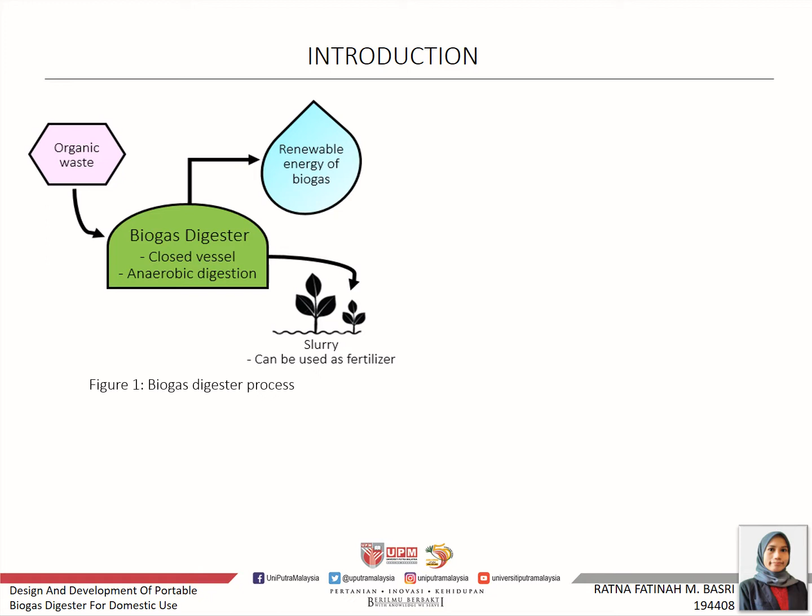In this study, a comparative review on available design types of portable biogas digester was conducted to determine the suitable digester design type to be fabricated and modified to meet domestic requirements.

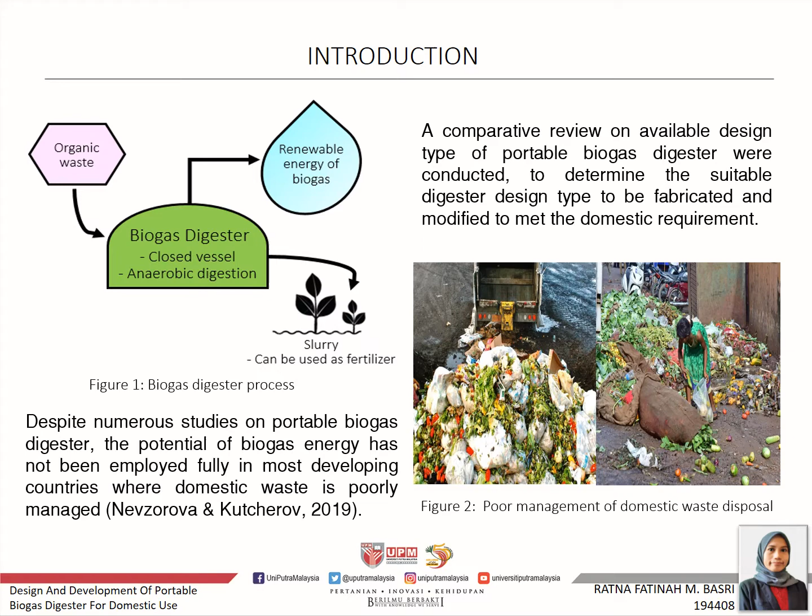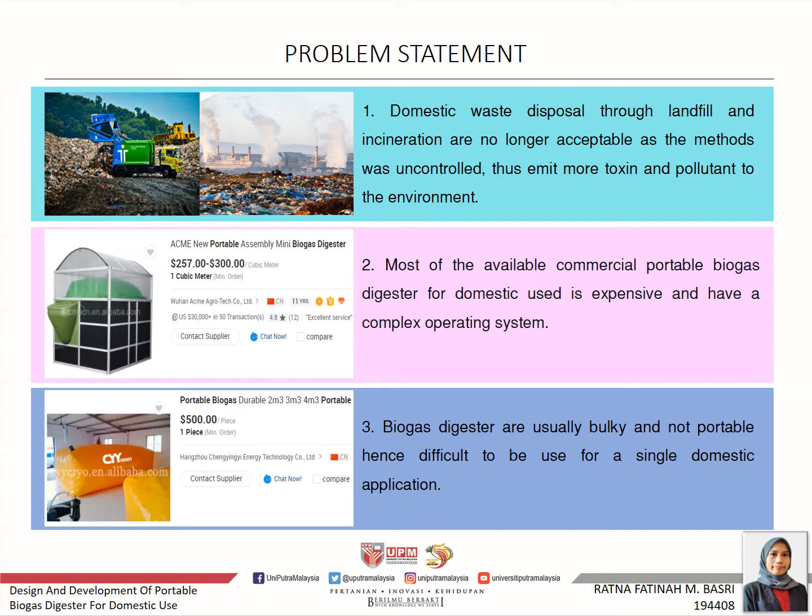For the problem statement of this study: first, domestic waste disposal through landfill and incineration are no longer acceptable as the method is uncontrolled and emits more toxins to the environment. Second, most available commercial portable biogas digesters for domestic use are expensive. Third, biogas digesters are usually bulky or bigger in size.

Moving on to the objective of this study. The main objective is to design and develop a portable biogas digester that produces biogas from various types of organic waste for domestic use.

In order to achieve the main objective of this study, there are several sub-objectives required. First, to study and select the suitable portable biogas digester design type for domestic use. Second, to fabricate a modified design of the selected portable biogas digester to meet the desired design specification for domestic use. Third, to determine the biogas production of the developed portable biogas digester.

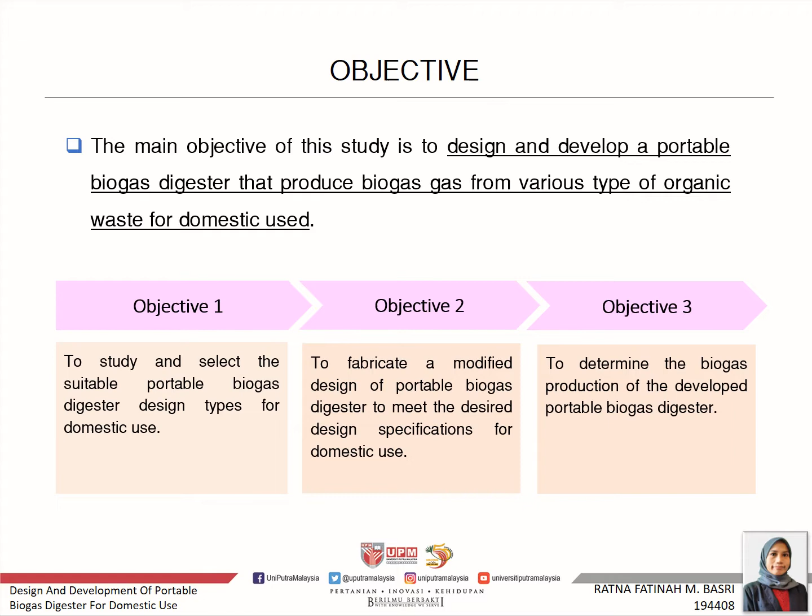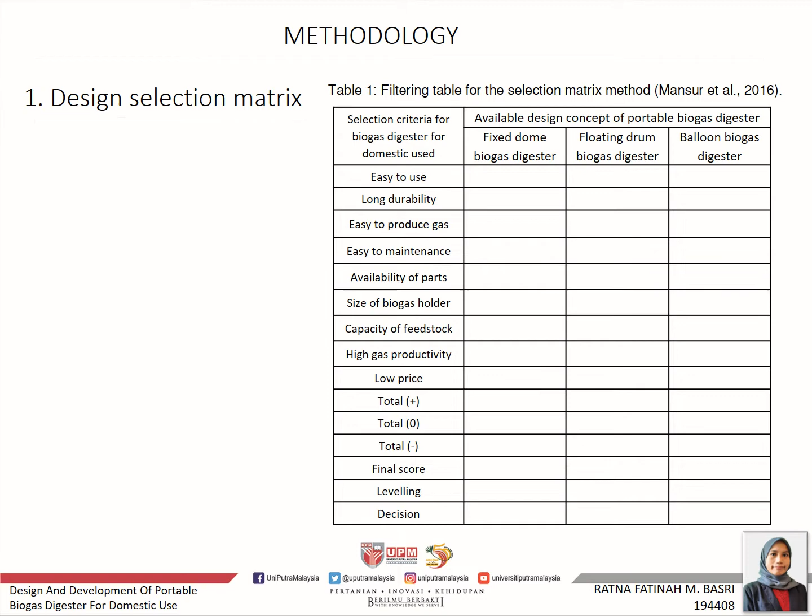The first methodology is design selection, where the selection matrix method was used. Table 1 shows the filtering table used to evaluate the available design concepts of portable biogas digester. The evaluation is based on the selection criteria for biogas digester for domestic use. On the left is the filtering table scoring procedure.

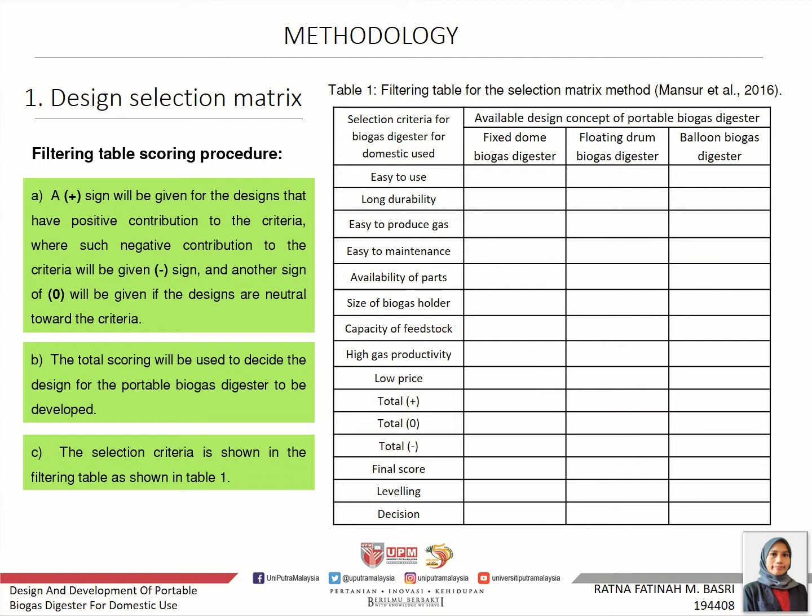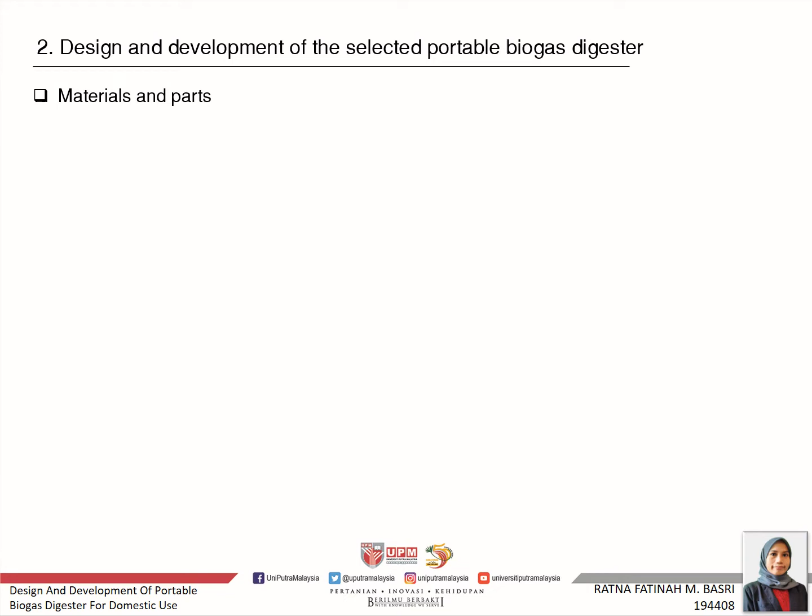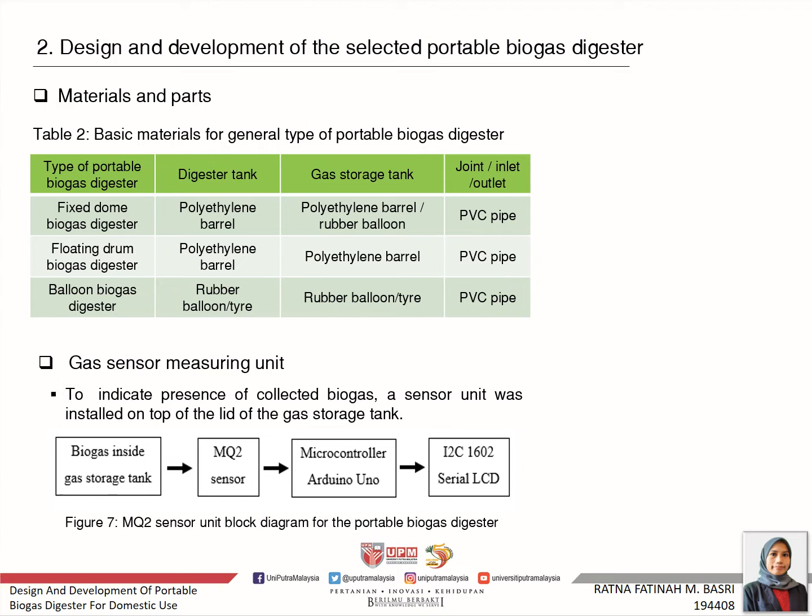Next, for development, a gas sensor measuring unit will be included to indicate the presence of collected biogas, where the MQ2 sensor connected to the microcontroller Arduino Uno and serial LCD via I2C will be used. The development also includes safety features to ensure safety and monitor the internal pressure inside the gas storage tank, such as a pressure gauge and safety valve.

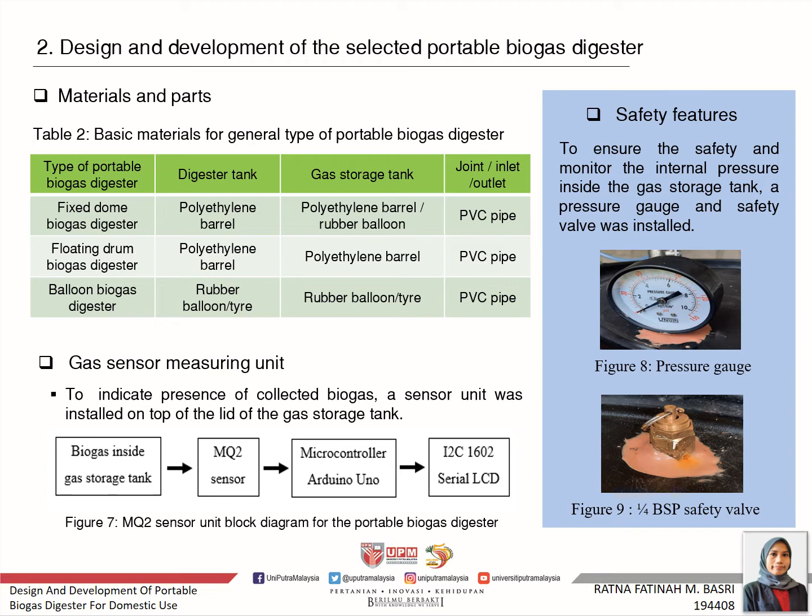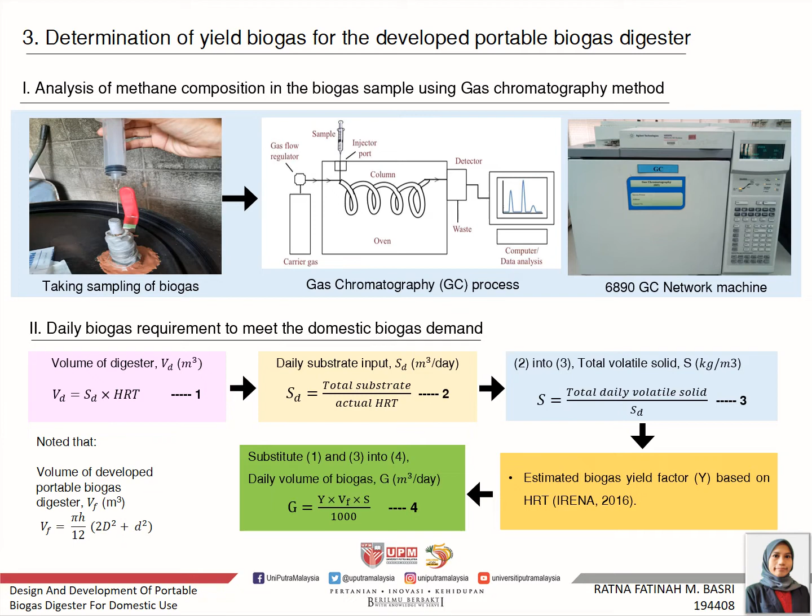The third methodology is the determination of yield biogas for the developed portable biogas digester. First is to analyze the methane composition in the biogas sample using the gas chromatography method. Second is to determine the daily biogas requirement to meet the domestic biogas demand.

Moving to the results and discussion. Based on the design selection matrix method, the portable fixed dome biogas digester was selected to be designed and fabricated as it had the highest score from the selection criteria for biogas digester for domestic use.

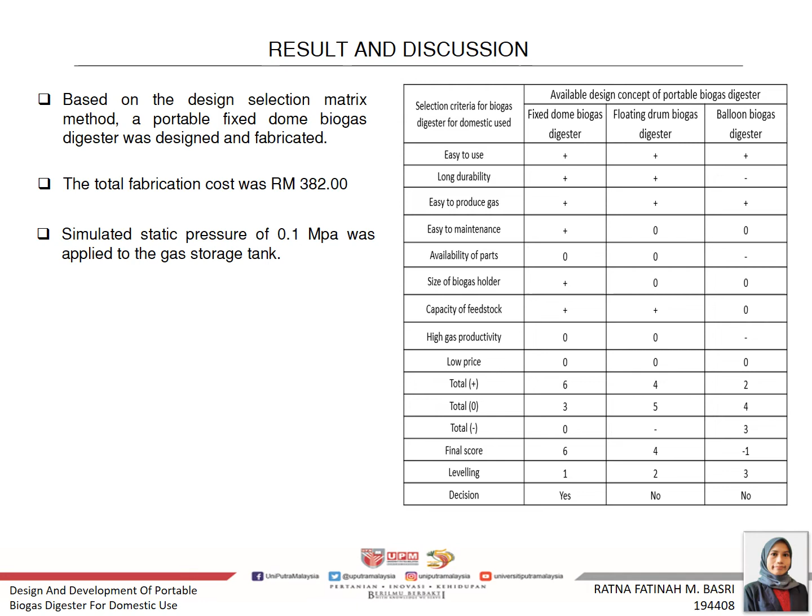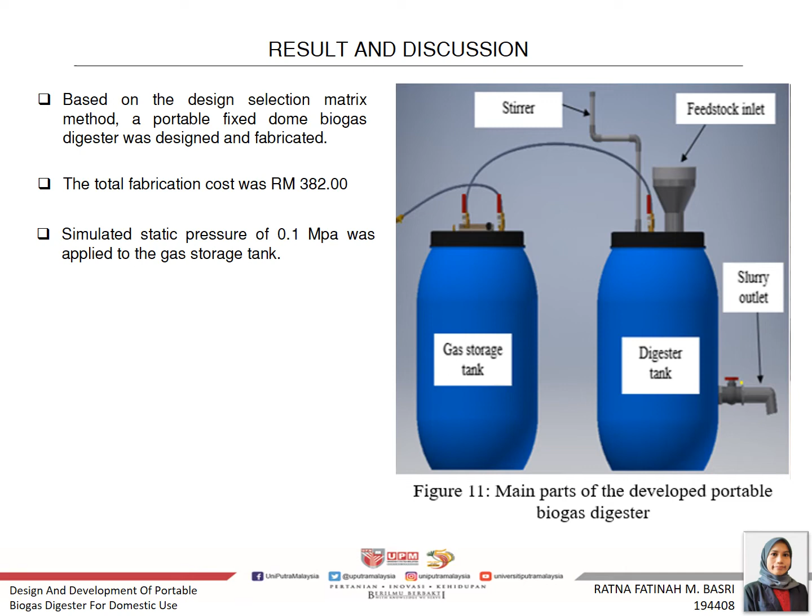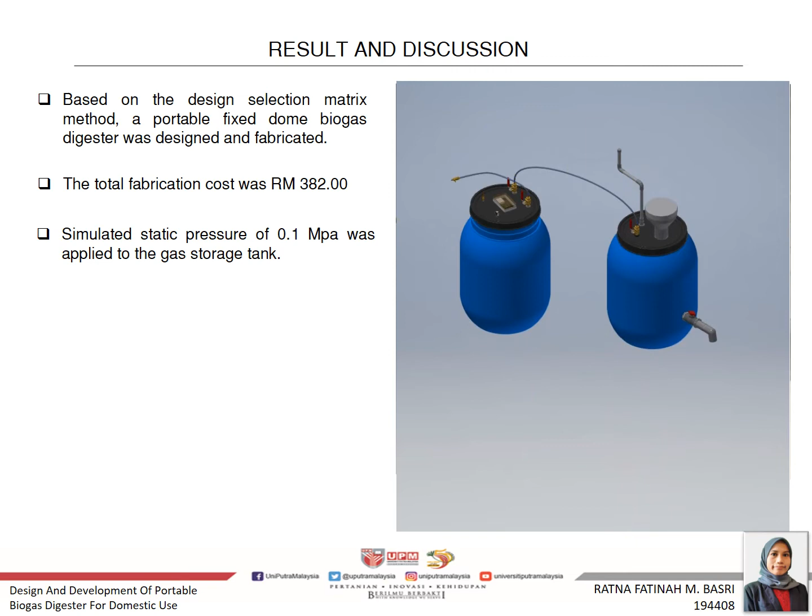According to the thin wall pressure vessel theory, a ratio of radius to wall thickness greater than 10 is able to resist internal pressure, with the condition that internal pressure is greater than external pressure. The developed portable fixed dome biogas digester has a ratio of radius to wall thickness of 37, which is greater than 10, thus it is able to resist the internal pressure.

To further ensure the safety, a 3-bar pressure relief valve is installed to ensure that pressure inside the biogas storage tank does not increase to a level that could risk the gas storage tank breaking.

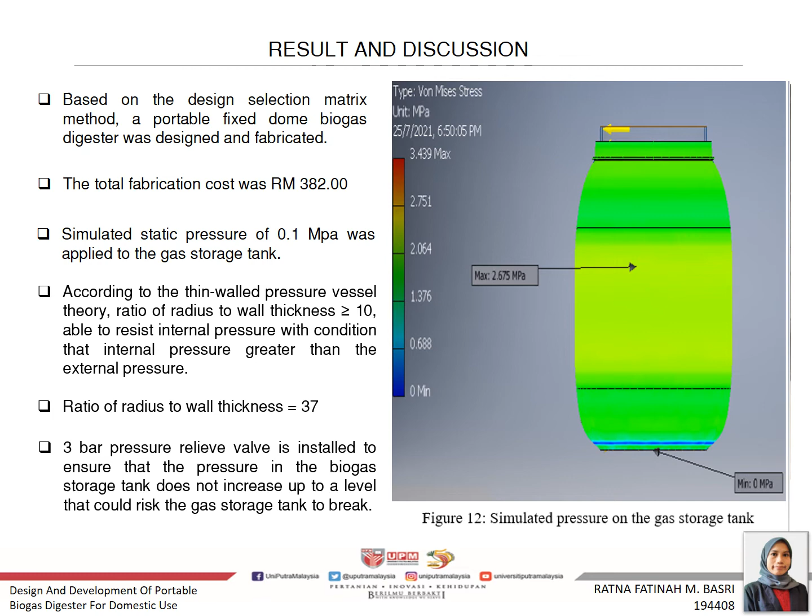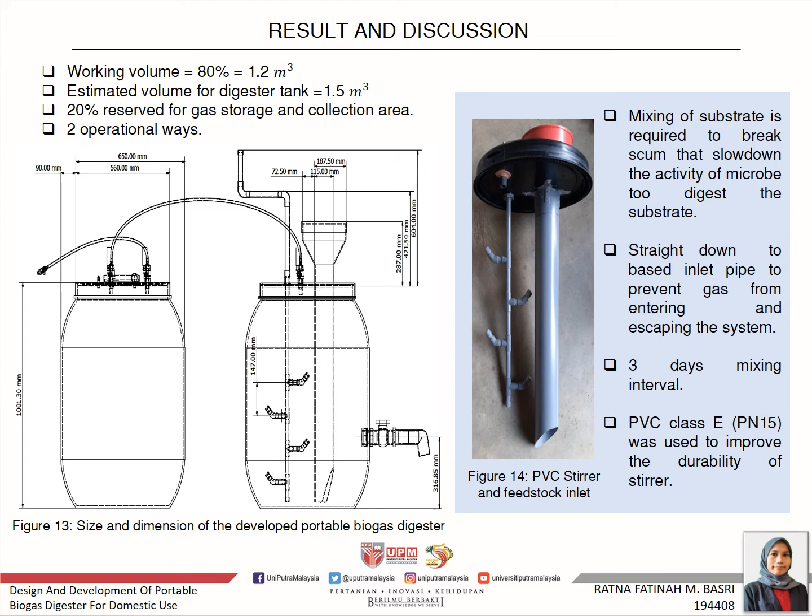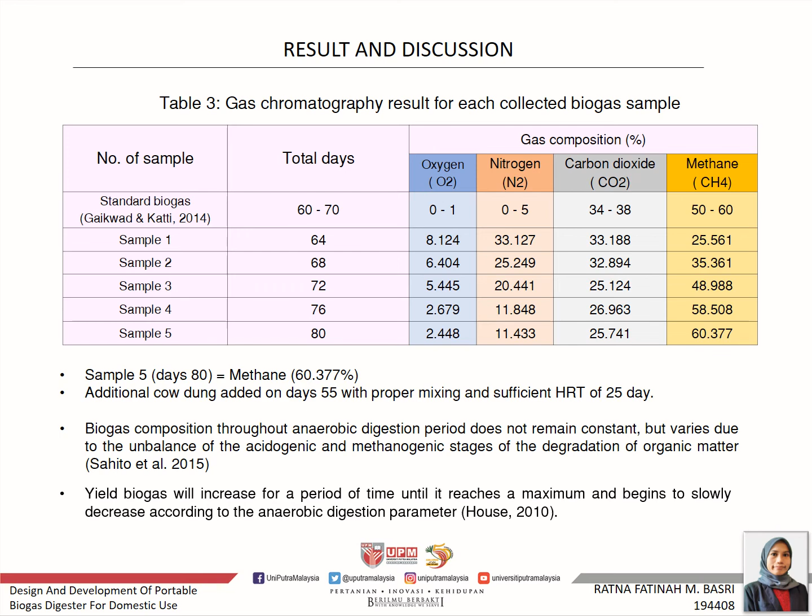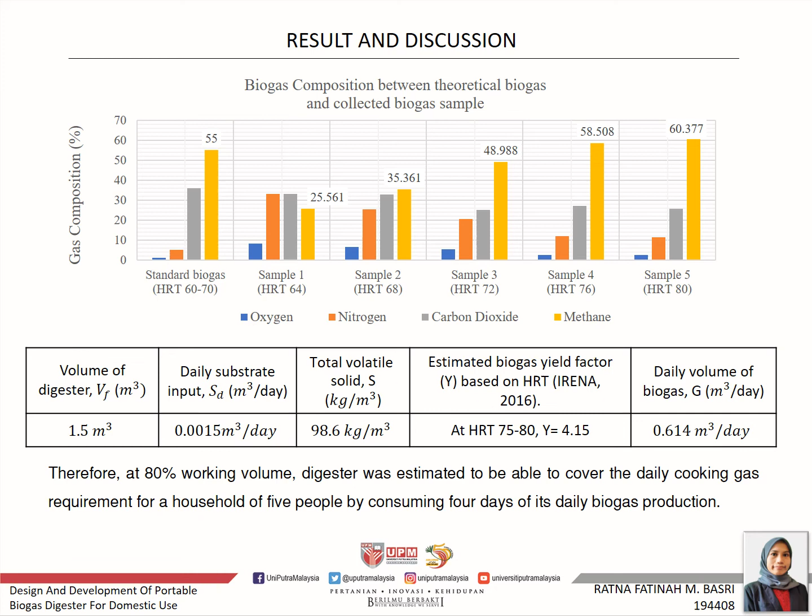From the obtained values of volume of digester, daily substrate input, total volatile solid, and biogas yield factor, the daily volume of biogas was determined to be 0.614 cubic meters per day. Therefore, at 80% of working volume, the developed digester was estimated to be able to cover the daily cooking gas requirement for a household of 5 people by consuming 4 days of its daily biogas production at 60.37% combustible methane gas composition.

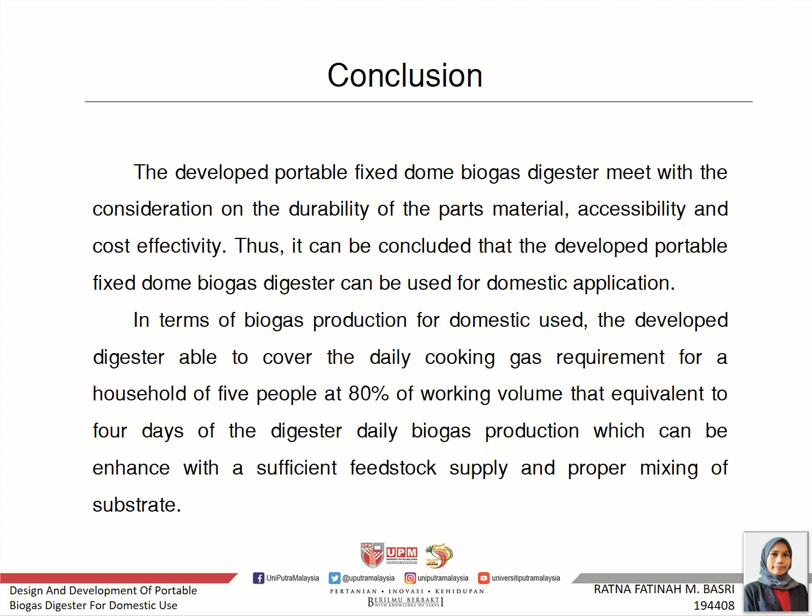Conclusion: the developed portable fixed dome biogas digester meets the domestic considerations on durability of parts material, accessibility, and cost effectivity. In terms of biogas production for domestic use, the developed digester is able to cover the daily cooking gas requirement, which can be further enhanced with sufficient feedstock supply and proper mixing of substrate.

Finally, the impact of the developed portable fixed dome biogas digester. First, towards society, the application of portable biogas digester in domestic areas helps contribute to managing and reducing domestic waste, such as reducing uncontrolled food waste disposal that might cause bad odor and increasing rodent population.

Next, the impact towards safety: the developed portable fixed dome biogas digester is installed with a safety valve to prevent high internal pressure inside the gas storage tank that could lead to explosion.

Finally, the health impact: the developed portable fixed dome biogas digester takes consideration of ergonomic factors. The height of the stirrer was set to the arm height level of an adult user, so the user does not have to bend to turn the stirrer handle.